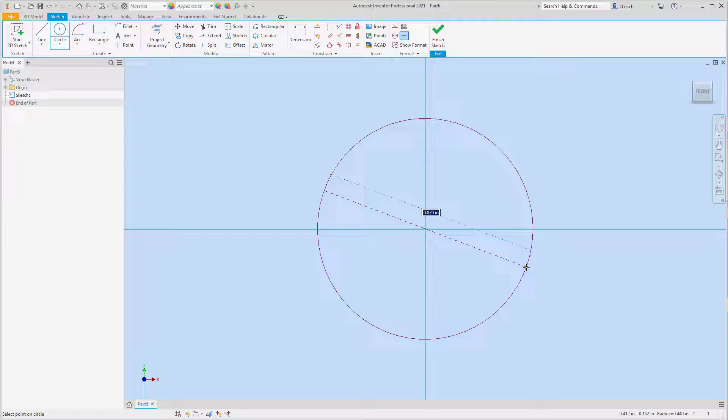I'm going to create a circle to begin with. So I'm going to do circle center point. My center point is going to be the origin here. I'm going to drag this thing out. This has a diameter of 8 inches.

And then I'm just going to finish my sketch. We're done. No, I'm kidding. I'm going to finish my sketch. I'm going to extrude this thing.

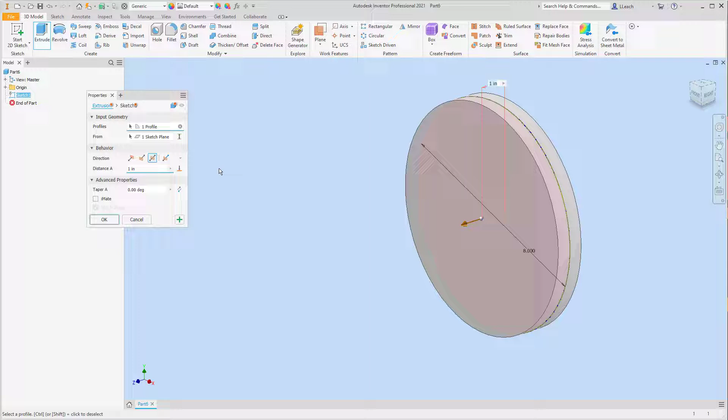Let's go back. Or we could do it symmetrically. I guess it really doesn't matter. I'm going to give this a thickness of 0.5. Like so. Hit the OK button.

And then I'm going to start a sketch on the front face of the circle. Let's see what we can do. I'm going to draw a line from the center straight out to the left. That's going to be, what is that, 4.5?

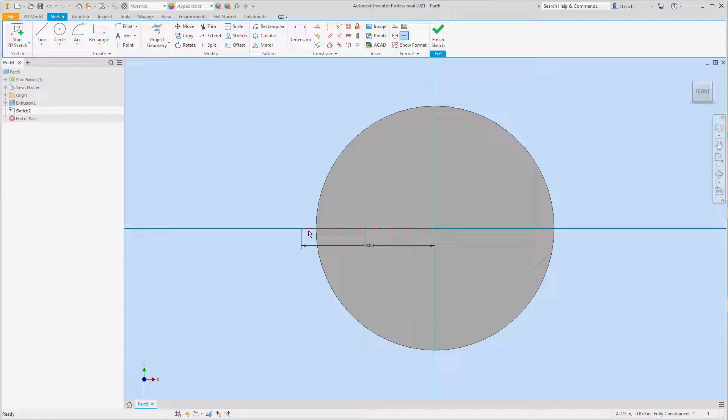And then I'm going to select this line. I'm going to change it to a construction line. So it's dashed there. I'm going to create a circle and use the end of that line as my center point. And I'm just going to give it an arbitrary dimension here. I'm going to come back and dimension it now.

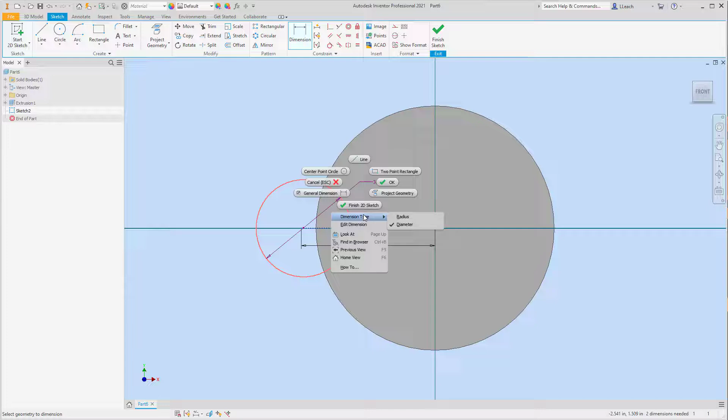So this has a radius of 1.5.

And then what I could do is I could project geometry. I'm going to project the outer circle, or not the outer circle, but this big ginormous circle. And then I'm going to trim just part of the circle I don't need. I'm going to finish my sketch.

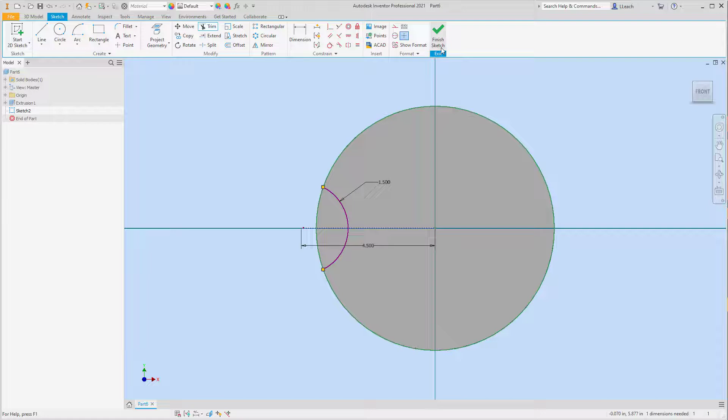I'm going to extrude that little piece. I'm going to cut it all the way through. Hit OK. Kind of looks like Pac-Man here.

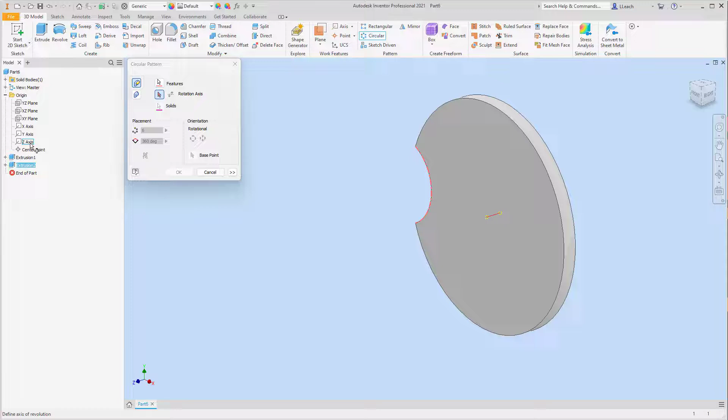So far. But then what I'm going to do is I'm going to go up to my circular pattern. And for my feature, I'm going to select this kind of Pac-Man's mouth here, which is kind of hard to get. It's right there. And then for my rotation axis, I'm going to open up the origin items. And then I'm going to click on the Z-axis as my rotation axis. And just make sure it says 6 in the placement, 360 degrees. I'm going to hit OK.

So it's going to cut out those. And then I'm going to do pretty much the same thing for the little slots there. So I'm going to go start a 2D sketch on this front face.

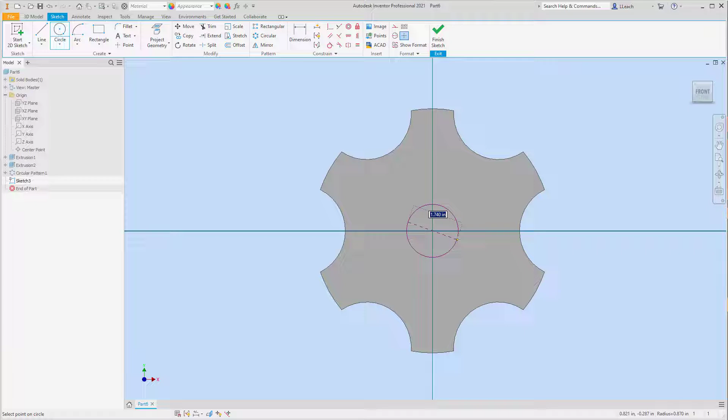What I'm going to do now, I'm going to draw another circle, center point from our origin here. I'm going to drag it out. This circle, I'm going to make it, let's see, it has a diameter of 4. And then I'm going to hit the escape button a few times.

And then I'm going to click my circle and change it to a construction line. Let me see if I can, I'm going to create a slot

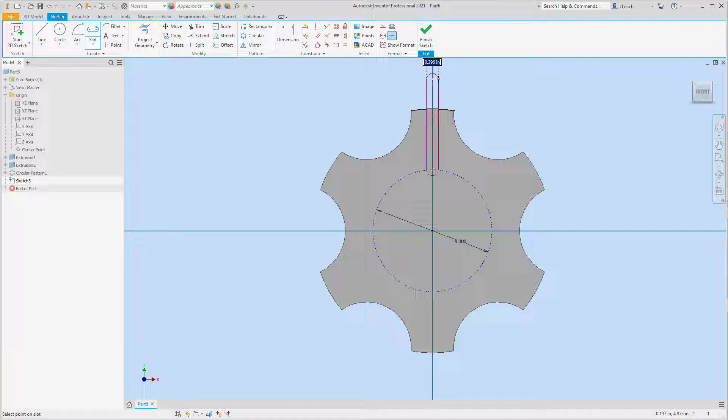Center to center. So I'm going to try my first one in my slot on this kind of intersection between this line and our construction circle. So where that yellow dot is, I'm going to click it. I'm going to drag it kind of up and off the end of the kind of ring here. And then I'm going to drag it out. And so this has a width of 0.5.

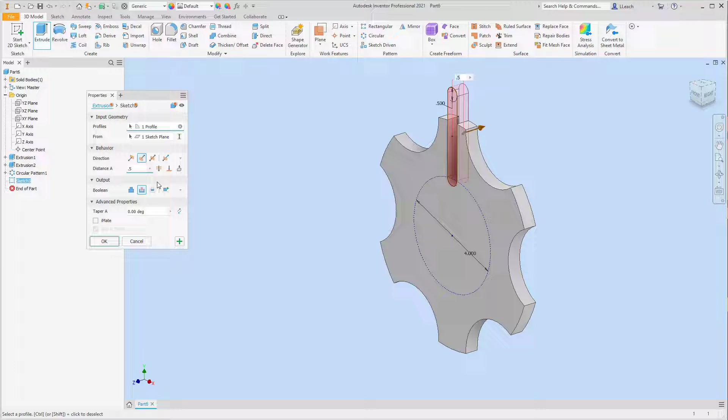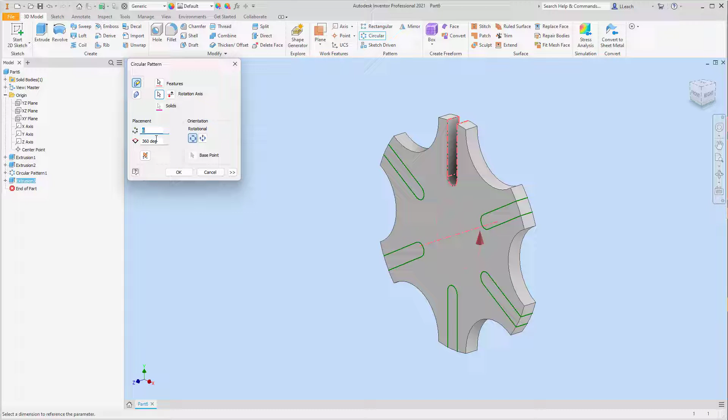And so now I can finish the sketch. I can extrude that little slot that I made, cutting it all the way through. Hit OK. Then I'm going to go back to my circular pattern. For my feature, I'm going to click the slot that we did. The rotational axis, I'm going to use this Z-axis here again. Just make sure it's 6, 360 rotation, hit OK.

So that's kind of the hard part, I think, but we got that done. All right, so then I'm going to start another 2D sketch on this front surface here.

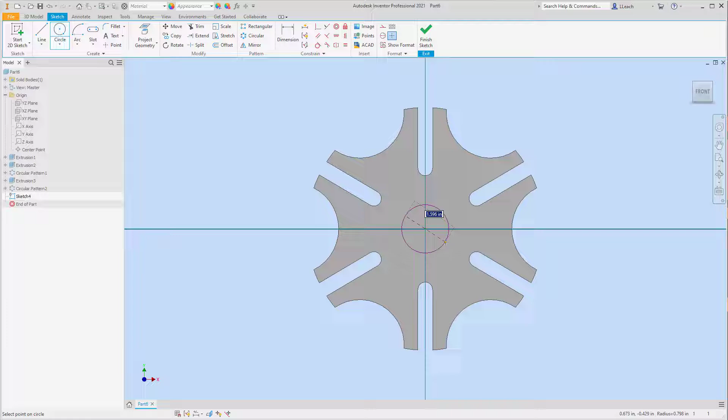I'm going to draw a circle, center point from here, and drag this out. This is going to be... 2.5. Then I'm going to make another circle, center point again, drag it out, and that has a diameter of 1.5, like that.

And then to create that little keyway on top, what I've done is go up to, not circle, the rectangle, over to the side. I'm just going to create a rectangle here and dimension it. So this bottom dimension is going to be 0.30. This side is going to be 0.20.

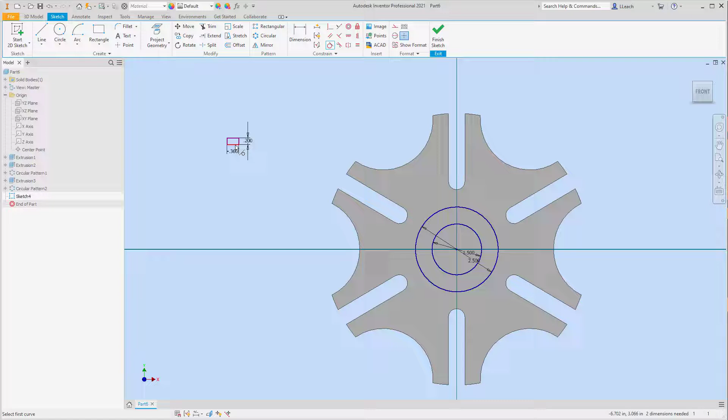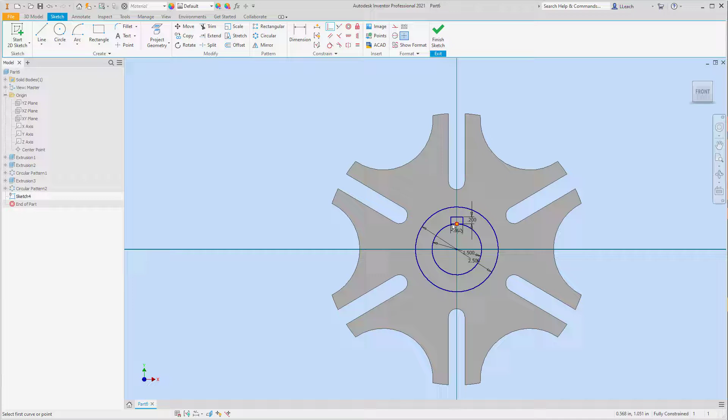And then what I did earlier, I use the quadrant, not quadrant, I keep calling it a quadrant, it's a tangent constraint. I'm going to click that, click on the bottom of my rectangle here, and click on the circle, which is this one, so it brings it down. And then I'm going to use this coincident constraint. I think this will work. If I click on the middle, the green dot here, and click on the circle at the top, it kind of clunks it right, sets it right on top there.

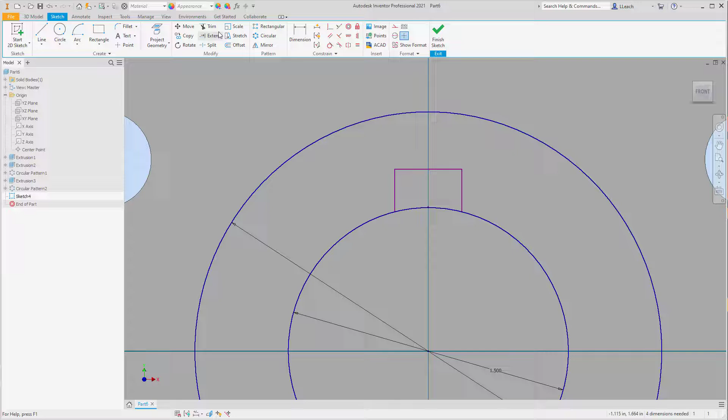And then what I had to do was get rid of these dimensions, so delete this, because doing that lets me extend these two lines down to that circle. I can erase this, trim out this part of the circle here, and then finish my sketch.

Let me look at this from a side view, kind of an ortho view. And then I want to extrude this inner part, kind of looks like an old-timey hand grenade. I'll click that and extrude it all the way back. I want to go under my extrusion here for my sketch and turn the visibility of that back on.

And then I can extrude this outer ring part. That's going to be 0.5, yeah 0.5, which it already is. I'm going to hit OK there. Then let me turn off the visibility of the sketch here to get those dimensions out of the way.

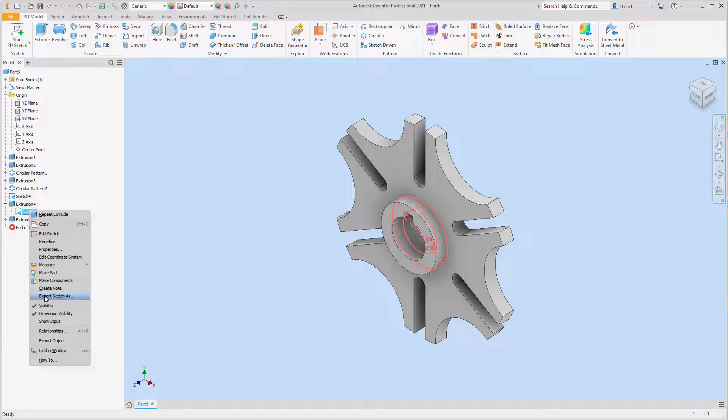Then all I need to do is go to fillet, and let's see what that is. That has a radius of 0.25. So here's 0.25, and then let's click on this ring right here, and it gives that a nice smooth curvy curve.

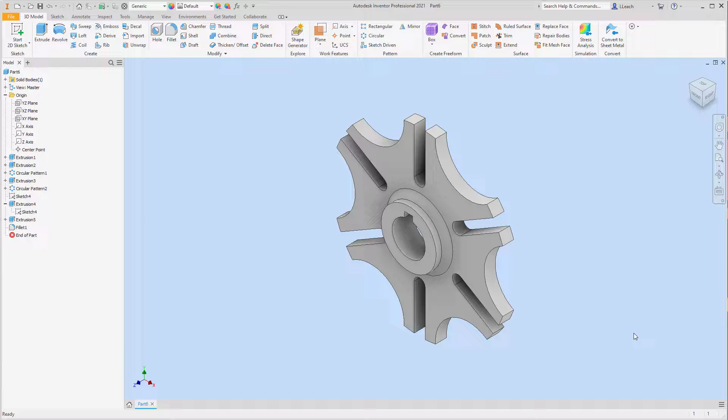And so that is our Geneva wheel. So I'm going to go up to view style, visual style, shade with edges, some shadows onto it. That looks kind of strange. I'm going to go to photo booth. Maybe that's a little better.

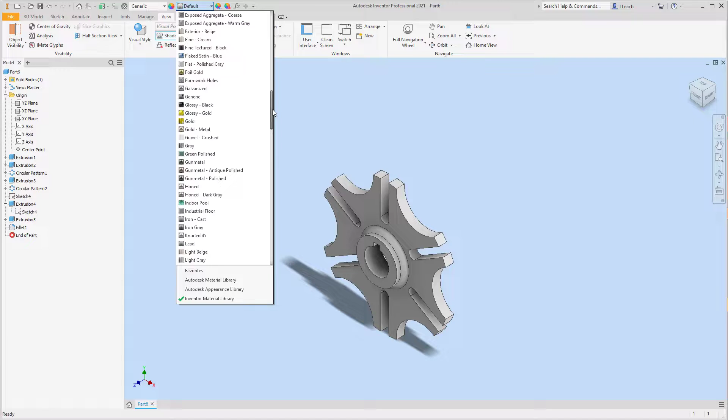Something tells me that this really wants to be kind of an orange color. I'm going to go up to my colors here and look for an orange. I'm going to run away from my usual white color. Hold on, come on now, don't be like that. Let's see what is... here's an orange. Yeah, that might work. All right, so that'll have to do.

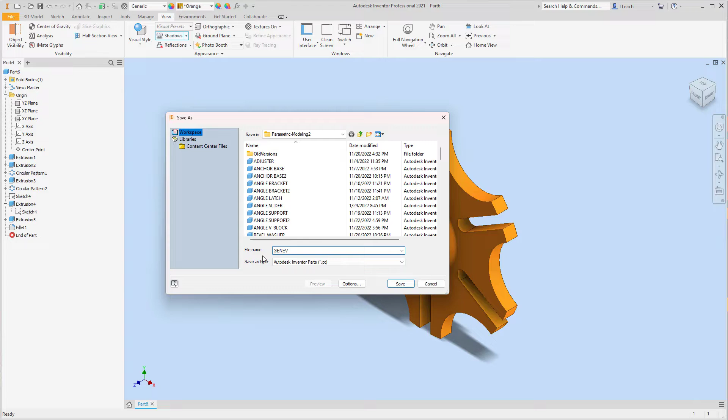So I'm going to go to File, Save. I'm going to call it Geneva Wheel. And there we go. All right, so we got that one done.